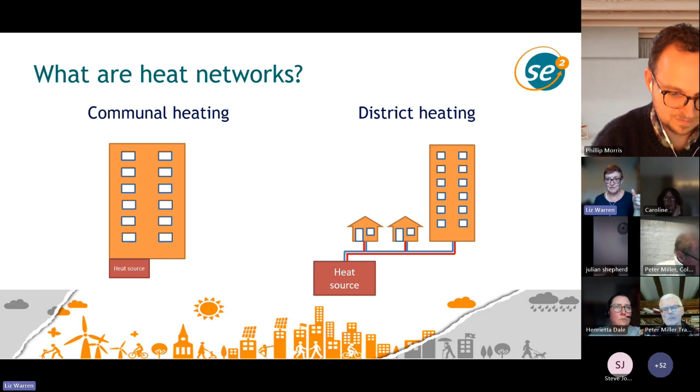In terms of scale, that can go from a couple of homes through to very large citywide heat networks, which draw on lots of different heat sources. They've got multiple energy centres and multiple inputs of heat into a network serving different types of buildings - homes, business properties, hospitals, university buildings, local council buildings, town halls, leisure centres. All of those could be connected through these networks, which are drawing heat from multiple different places.

We'll hear about Plymouth in a little while from John, which is a great example of one of these where they're trying to draw together multiple different heat sources to connect up multiple different types of buildings. At this scale, it tends to be very urban - you could talk about Newcastle, Leicester, Nottingham, Liverpool, lots and lots of major cities that have heat networks.

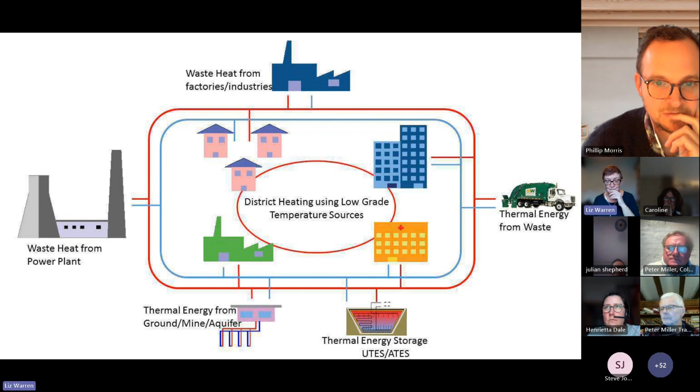But we also see them at different scales, and I'll come back to that a little bit later, just to explain a little bit more about the types of heat networks that are out there.

There's an issue with the slides not being visible to everyone. Let me exit spotlight so that should show your slides, because something is happening where your slides aren't clear to everybody. Some people are seeing them and some aren't. Most people can see them now though, so carry on, Liz. I'll read out some more - mostly it's been diagrams so far, so we'll see how we go.

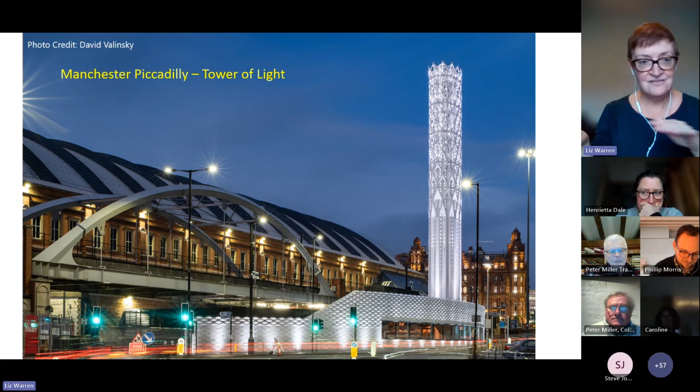And the Tower of Light, that energy centre has a gas-fired heat network and CHP system underneath it, which is sending out heat and hot water to a lot of buildings in Manchester city centre.

My next one, this is the Bunhill Energy Centre in Islington in North London. This is a kind of classic of the heat network sector, we're all quite fond of it. It started off as a gas network, but it's developed over time, and Islington Council, who run the network, have been really interested in how you can bring in different sources of heat.

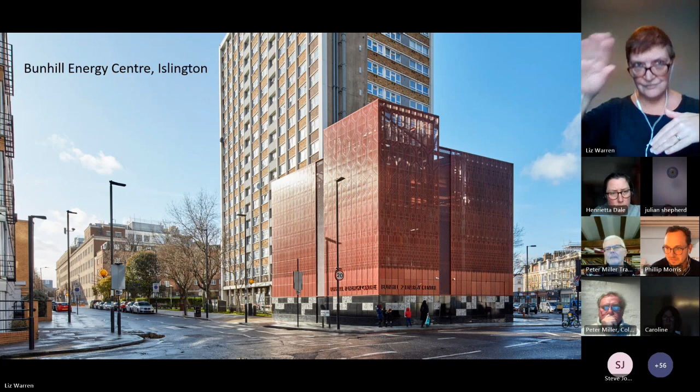This actually draws up waste heat from the London Underground. So all the kind of heat and warmth that the London Underground generates naturally is drawn up into the energy centre, and then used to heat hot water to go out into the heat network.

This is the heat network in the energy centre in Gateshead in the northeast of England, which I just think is a really pretty building. That's actually drawing heat from former mine workings into a heat pump, which then goes out and is distributed around town. That's a really exciting project, making use of underground energy resources.

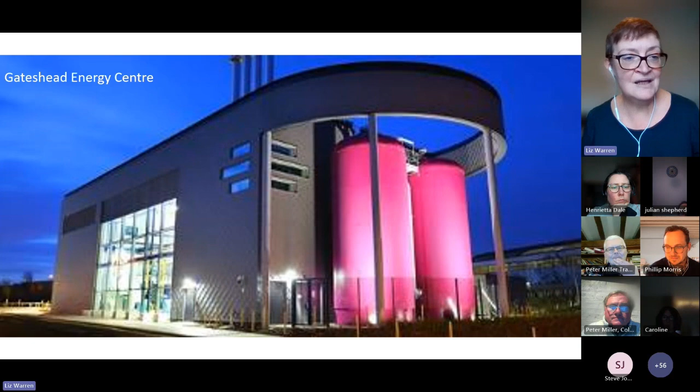And then perhaps my favourite, purely for quirky personal reasons, this is the Amager energy from waste plant in Copenhagen. Denmark is really the centre of excellence of heat networks and district heating, in terms of its reach across a population.

This quite beautiful energy from waste plant - the green across the top of it is a dry ski slope, and in winter a snowy ski slope. So if you wanted to go skiing in Copenhagen, that would be my recommendation to you.

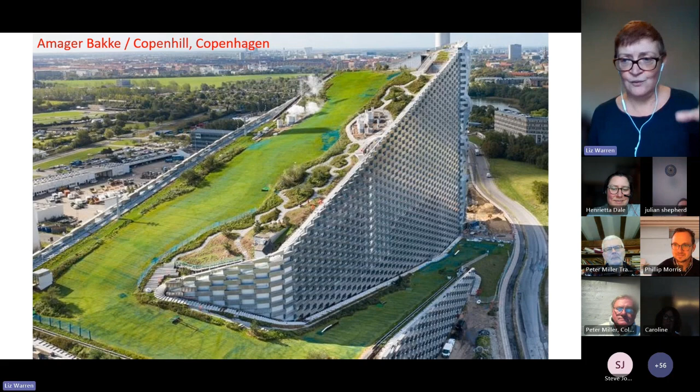Now, I talked a little bit about these being quite urban things sometimes, and it's like, well, where are heat networks? Heat networks tend to be where there's high heat demand density - lots of people who need heat or hot water or steam or cooling, and lots of people who are near to each other. So there's demand and there's density of demand.

Historically, heat networks have been very much associated with big urban centres, and that's where a lot of government policy and thinking has been - let's get the biggest bang for our buck right now by looking at those big centres. Some of the longer standing networks are in places like Leicester, Nottingham, Southampton. Some of the big developments right now are happening in places like Bristol, and as I said, we'll hear about Plymouth shortly. However, not all heat networks are in major cities.

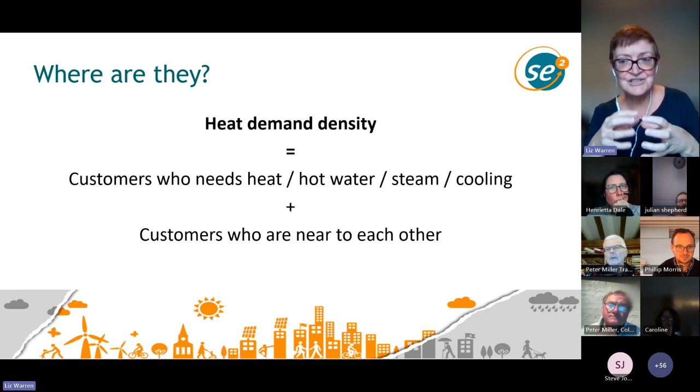Government has recently published a map - there have been several iterations over the last decade or so - of heat demand for the country. You can see where there is potential for a heat network, technical potential, and quite a lot of what you might think of as medium-sized towns or market towns have potential, or there are some very location-specific places where there's potential for a network.

For example, medium-sized or market towns like Rotherham, Halifax, Solihull, Worthing have all got different networks popping up for different reasons. The one in Solihull, for example, which is where my mum lives so I kind of keep an eye on it, involves connecting a leisure centre which already has a gas-fired CHP unit to other buildings locally, including a local college and schools.

We're seeing heat networks as options in some of the planning for new garden villages, urban extensions, edge of town developments. I wish the planning policy would be more proactive and positive towards heat networks and heat pumps generally, rather than allowing fossil fuel heating to perpetuate. Anyway, another day.

We also see examples where industrial sites that are producing a lot of heat, for example a glass factory, are able to connect to or be the hub of a network, because that waste heat is worth something - they can sell it into a network. We're seeing a lot of discussion with things like data centers on the same basis, with waste heat from data centers being used to go into networks.

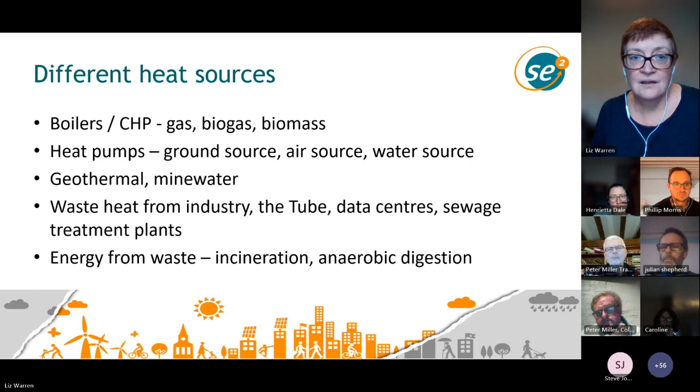I wanted briefly to touch on the relationship between heat networks and community energy, because a huge amount of this is being done either by private organisations, or by private organisations working with local authorities, housing associations, or the public sector more generally, who have the social drivers. The local authority or housing association has been the guardian of the social drivers of heat networks, but it feels like community energy has a role to play, and communities have a role to play, as heat networks become much more part of the fabric of our energy system.

You'll know community energy historically has focused more on power than on heat. It's more and more got involved with retrofit, and it's starting to engage with heat in different ways. But heat is the big challenge when it comes to energy - we use an awful lot more kilowatt hours trying to keep warm than we do trying to run our laptops and keep the lights on. So we need to think about heat, alongside energy efficiency and retrofit, so that we're doing sensible things in terms of insulating and then heating.

Hopefully I've got across that heat is quite a localized thing, and the type of heating system or heat network that you end up with will be about your place and the heat resources that are available to you locally.

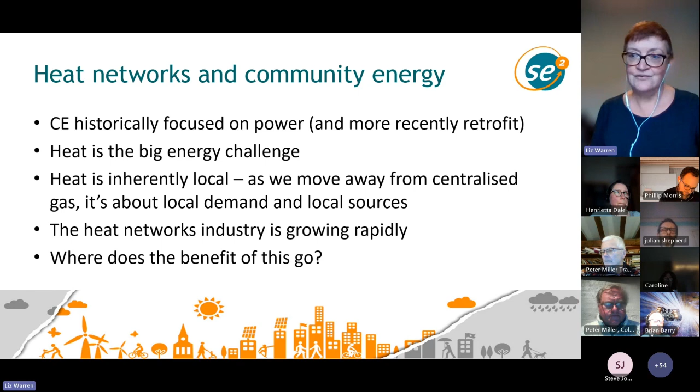And that's the type of model that community energy has always tried to break apart. So what kind of relationship can community energy organisations have with heat networks? Now, the presentations that you'll go on to hear after this one will give you some detailed examples and a really good look at some of the options, but I just wanted to set them out at this stage so you've got some things to be thinking about as we go through the afternoon.

So there are different options. There's the option which might sit most familiarly with the community energy sector, which is community ownership or shared ownership or a shareholding in an energy project. That carries an awful lot of risk. Potentially it carries some reward, which can be then reinvested through your community funds, your community benefit funds. But ownership of a heat network - these are quite large infrastructure projects

with quite a lot of complexity. But that's one option to think about. The community benefit fund, social value type provisions, what we see on the large onshore wind type developments, is this sort of community benefit as a payoff. And I mean, it's great, but it could be so much more.

So what if there is that community benefit funding, how can that be deployed in different ways? How can the community really decide what they want to do with it? The Bristol heat networks being developed by Bristol City Leap are amazing at this in terms of thinking about funding and social value and traditional definitions of social value around employment, but also about really engaging and empowering the community on all aspects of energy.

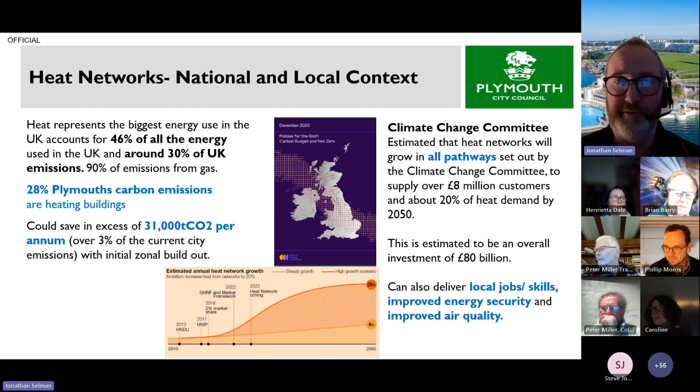So we know, and that's a big ticket item. It's been estimated to be in the region of £80 billion, which is more than offshore wind. So there's a lot of investment flowing into this sector from a variety of sources, some of it pension funding that's got a very long investment cycle, investment model of 40 years or so. But the interesting thing is the Climate Change Committee also pointed out this is not just about decarbonisation. They also identified this would lead to improvements in energy security, because you've got far more diversity, local sources of heat involved in those networks, and also air quality, which I'll come on to. From our perspective, we're interested in local jobs and local skills as well, very much - social value is a big driver for a local authority.

So we've seen quite a lot of changes in the way we heat our buildings over the years, and it's difficult maybe to remember what drove those and what those changes have looked like. I think it's quite interesting thinking about this, because originally this was driven by legislation. If you remember, if any of you have watched The Crown and the bit about Winston Churchill trying to pretend the smog wasn't a problem, until one of his members of staff got run over by a bus, then you'll know about the Clean Air Acts and the fact that we've moved from burning coal in our buildings, in fireplaces. Change happened really quite rapidly as a result of legislation originally driven by air quality.

But of course, gas is also contributing towards NOx emissions that might not be so visible, might not be creating smog, but equally that's a very significant air pollutant, particularly in cities.

And the graph at the bottom shows the uptake of central heating in houses. I'm just about old enough, I hate to admit, when I was very small, to live in a house without central heating, and my gran was probably several decades after that. It just shows how rapidly change happened, from buildings not having any central heating to having central heating systems - the uptake was massive over two decades. And I suppose that's the challenge we've got over the next 25 years. So legislation, amongst other things, can make a huge difference and drive things forward.

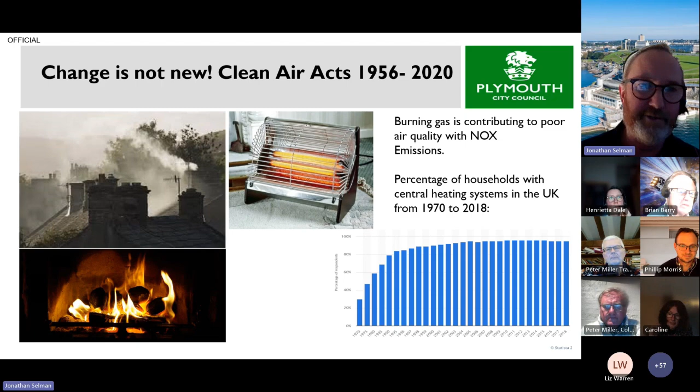So Liz has already picked up quite significantly about what a heat network is, but just to hit one point home, which is around the principle of heat networks - they're accessing the lowest cost, low carbon solution, and that's driving some of the legislation, zonal legislation that's coming through at the moment. And that means waste heat sources, which are there already, stable, not being utilised, are a really good source. I've been quite amazed in Plymouth just how many significant waste heat sources there are that we can deploy.

And they can have other environmental benefits associated with that. But yes, Sweden and Denmark have been down this road since the oil crisis in the 1970s, and even before that, so they've got really extensive heat networks, and there's an awful lot we can learn from the Scandinavian countries in particular around their approach.

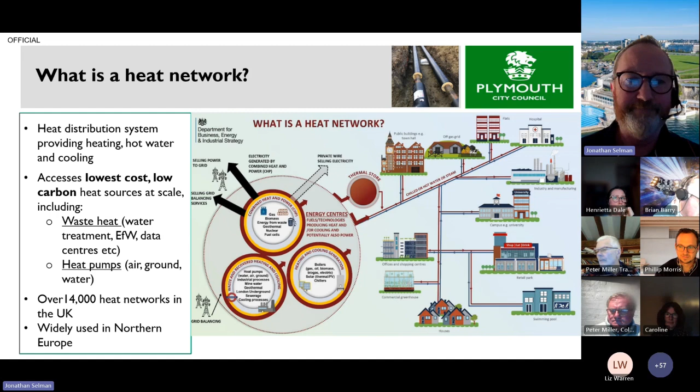So yeah, I mentioned legislation. The Energy Act originally gave powers to the last government, interestingly enough, to implement heat network zoning legislation, and that's been followed through with the new government, which is nice to see - that there's some continuity in terms of continuing to back this approach. So, as I said, it's very much about creating zones which create certainty for investment in heat networks on the basis that it's the lowest cost, low carbon solution.

And we found certain buildings, particularly in the city centre of Plymouth, you can't put an individual heat pump on - there's just not enough roof space. So sharing a heat source can be really important technically as well as in terms of the economics.

And the approach they're proposing leads to a raft of regulations, which they're working on at the moment. So Ofgem have already been appointed as regulator for heat networks - that's existing and new heat networks. And I'll talk about the consultation, which is ongoing, that Ofgem are leading.

And there's also been consultations around the zone legislation. Effectively, the intention is that there'll be a zone developer who would roll out, be selected through a competition process, which might be run by the local authority, who would be the principal developer of heat networks and operator of heat networks within an area.

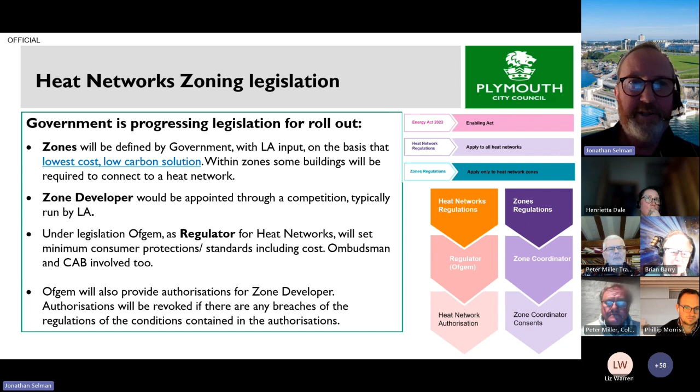So this has been driven nationally and locally. It's really important in all your local areas to try to get local authorities to have supportive planning policies around this and strategies that really help. So we've had through our climate emergency declaration, and that's driven a whole range of things.

So our Plymouth plan, our corporate plan - one of the six priorities is green investment, jobs and skills. Our net zero action plan very much refers to heat networks. Our local economic strategy, for example, talks about heat networks as well.

And our joint local plan, which is our planning policy, has basically been very strong in this respect, underpinned by our citywide strategy on this. So it's really important to have the policy frameworks in place on a local level if you can. So do make those points to your local authority.

And so planning policies basically have to be underpinned by evidence - it has to go through an examination. So our evidence in part was the citywide strategy, and that came up with these quasi zones in 2017, and then that was adopted in our policy. So we've been busy lining up new developments, major developments, which can connect to the network as and when that network is there, if it's not already.

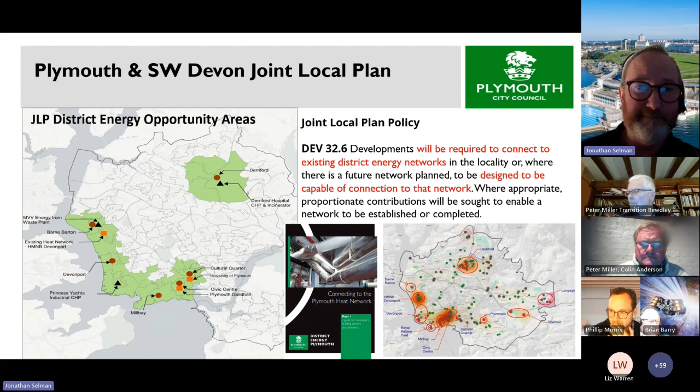So, I'll start to talk about the benefits. Across those two zones, we've modelled schemes which we feel could be economic, of around 400 million. So it's a big investment that's needed, possibly in some cases beyond the means of community energy, but I feel community energy definitely has a role to play in this overall mix.

So obviously opportunities with jobs, significant, probably one of the most impactful things we do as a local authority in terms of decarbonisation. The zonal approach could, we feel, achieve between 3 and 5% reduction in Plymouth's carbon emissions, which kind of aligns with that 20% figure that's been mentioned before.

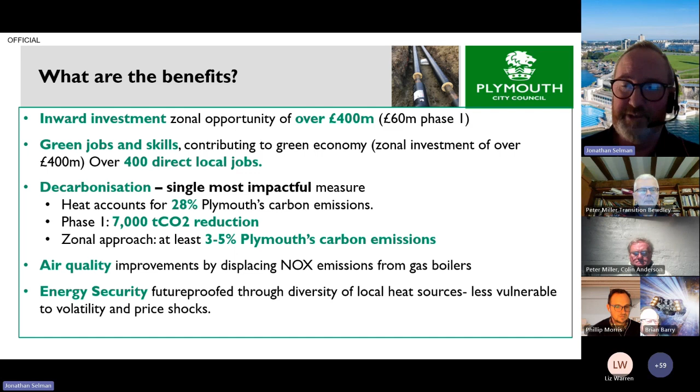But obviously, using carbon as the only commentary around heat networks is missing a trick, and air quality, energy security are also key facets to this approach. It's really important to keep mentioning those other issues, other benefits.

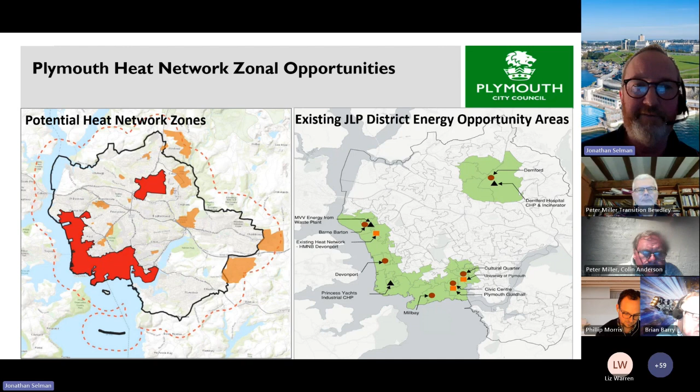And the largest zone that's shown in the previous slide in red, there's effectively the waterfront area. So this is the city centre. I'm not sure if my cursor is showing up on the screen. Maybe I can click on cursor.

That wouldn't be the end of the heat sources. Clearly, you need to build resilience into these schemes and diversity because, for example, the energy from waste plant has several weeks downtime in the summer, and there may be unplanned outages as well. So effectively, the other waste heat sources we can deploy within that scheme.

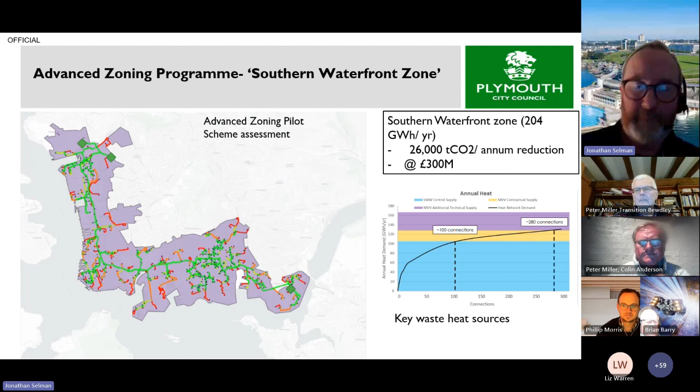So that shows the potential, and this is where we're starting. We're starting with a reference scheme that we intend to go out to the market with next year as part of a zonal approach, which would harness some of the waste heat from the Southwest Water Plant.

And that's an environmental good story there, because effectively what we're doing is taking waste heat out of the treated water, which would otherwise go back to the sound, going to the sea. We know that the sea's heating up, so it's taking heat out of the urban environment and using it in the heat network.

But we're also considering, we're also trying to utilize a low temperature system that can also dump cooling. Increasingly, we're seeing cooling demand increasing, and that can be rejected back into the network and reused on other buildings for hot water demand, for example, in the summer. So waste heat recovery is another potential benefit.

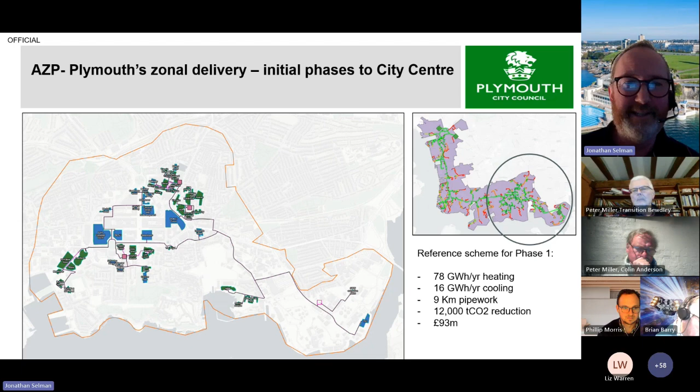But obviously, heat networks don't have to only be concentrated in the really dense areas. I saw a presentation recently from Gateshead where semi-detached council housing is being linked together by a heat network that can connect to a wider heat network over time. I also saw Liz's energy centre at Gateshead earlier, which is, I think, next to their solar farm. So at times it's zero carbon. That's a replicable thing for community energy as well.

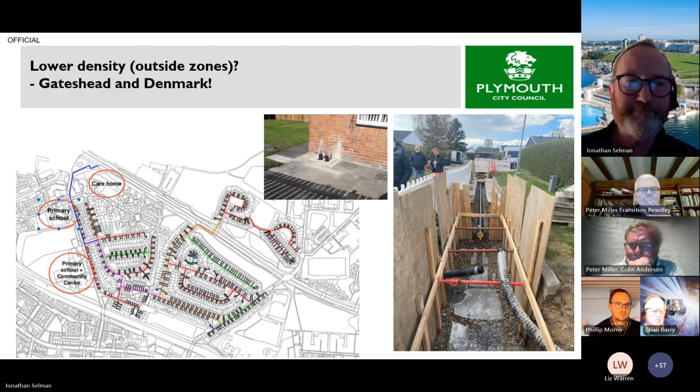Outside heat networks, often the presumption is that air source heat pumps might be the primary technology. I'm just trying to signpost you to a report done by Regen Southwest with Kensa a number of years ago, which obviously has an impact upstream on the electricity grid. This was looking at some of the benefits of using a ground source approach rather than having a dominance of air source heat pumps.

Ground source schemes are classed as heat networks as well. It's another way of using lower temperature, ambient type networks where you're linking up boreholes to supply heat to buildings using a water source heat pump at the interface.

This report was identifying some of the wider societal benefits to the electricity grid, meaning you don't have to put so much upstream reinforcement on the grid, and you don't necessarily have to put so much renewable electricity upstream. So we need to be clever about how we apply heat pump technology, and perhaps consider the opportunities for ground source as well, because of those wider benefits.

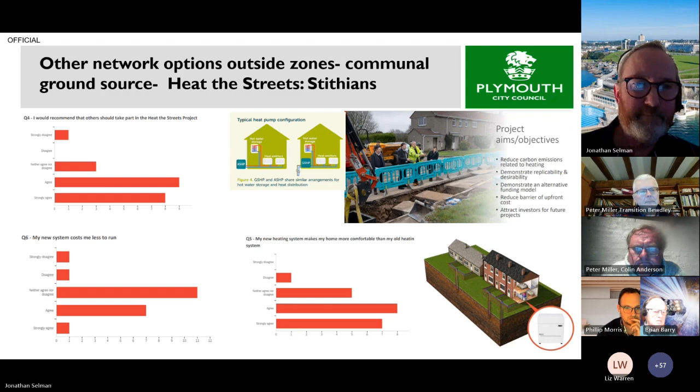Effectively it's a heat network, but instead of, as you can see from this smaller insert image, having an external air source heat pump, you might have an internal or external water source heat pump at the building interface. That's showing Coastline, one of the housing associations connected, who've used air source heat pumps before but really believe this is a good solution. This is an example of a Kensa type shoebox externally in a cabinet, just to show how small those water source heat pumps can be.

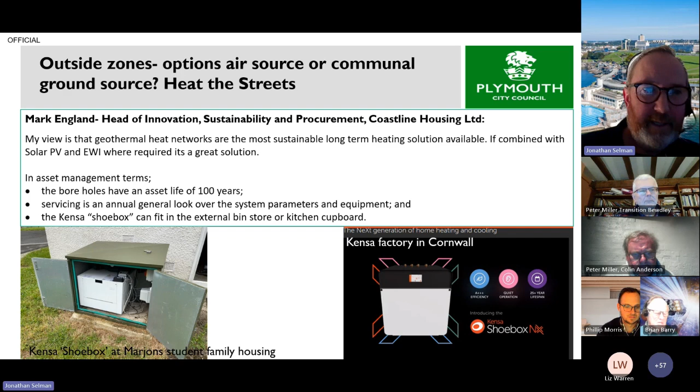So, community energy. Swaffham Prior's been mentioned quite a bit - many of the buildings in the village in Cambridgeshire were heated by LPG. It's been through a bit of a journey, and it's using a mixture of air source, ground source, and electrode boilers, so there is diversity in that heat network.

It's interesting learning from that approach, because there was quite a lot of resistance from some people during that process, arising from disruption or people being skeptical about the change. I don't know if anyone's on the call from Swaffham Prior who's been involved in it, but even the worst critic of the scheme on social media now wants to join it.

The interesting thing is seeing the ripple effect - the adjoining villages also want similar schemes now. That's really where we want to be, where it's not seen as something new, but people are asking when they can have this rather than asking what is this and what does it mean for us.

I think Rossendale are also on the call later on, so I won't say anything about that particularly now if it's going to be repeated. But clearly there's a role for community energy, particularly in constrained sites where air source heat pumps are quite problematic in terms of space or noise, for example.

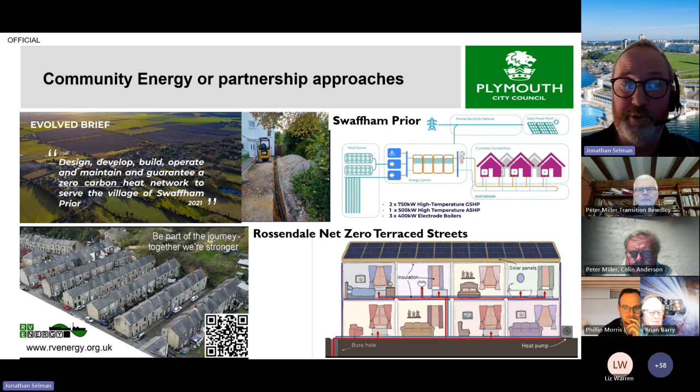There's a parliamentary call for evidence at the moment about unlocking community energy, with reference to the local power plan. That call for evidence actually identifies that community energy typically involves people collaborating with others locally to generate low carbon heat and electricity. That was music to my ears to see, actually.

I think maybe you can engage with that call for evidence and contribute if you're aware of heat schemes, but certainly there's scope for community energy to be involved in that, maybe as part of the local power plan. It'd be interesting to see what the government's proposals are around that.

Clearly there are some challenges and opportunities ahead. Social housing is a good place to start. Certainly in Plymouth, we found they have a preference for ground source because of the long-term benefits and lower costs to their tenants. There's some challenges there, but it's always good to get some scale with social housing, so that's a good way to anchor initial schemes.

There are some challenges where you've got flats with individual gas boilers - how do you link those up to a network? There's some potential funding routes that can help warm homes; the Social Housing Decarbonisation Fund can pay for costs towards connection. There are also challenges around metering and billing, which might be a challenge for community energy, though there is a way around that.

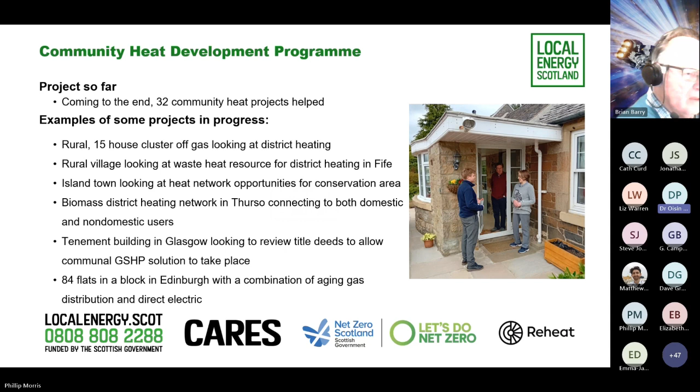Or 84 flats in a block in Edinburgh with a combination of aging gas distribution system and direct electric, looking to completely decarbonise and find an alternative appropriate solution. So it just shows there's a very wide range of projects, like from the small rural up to the middle of cities.

So the first one is Warmlie. I think Brian is on the call from the community group. This is a really exciting project where we've made it through to stage 3 of the program. Initially we gave them an options appraisal of what the decarbonising solutions could be for the project. It's approximately 500 houses, a mix of social and privately owned, with some large non-domestic users as well - the university campus, the NHS Dunbar, the local high school, and a mix of small industrial units.

We gave them an options appraisal for a biomass district heating scheme, ground source heat pump solution, and the counterfactual to all these projects is individual air source heat pumps, to understand whether the heat network stacks up against them. Because of the scale of this scheme, we couldn't look at the capital cost in the initial stage 2, but as part of the stage 3 program, that's what we're investigating - looking at the economic impact if the larger users don't connect to the heat network to form that base load, and whether there could still be a viable business case to develop the network.

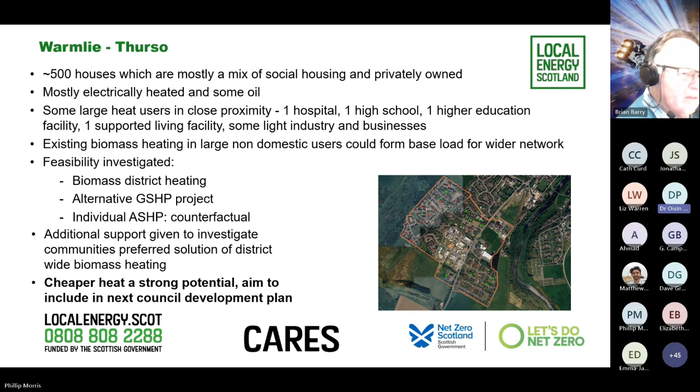We've been engaging with the Highland Council to try and include this project in their next development plan, which will help it go through the planning process a bit easier if it's seen as a viable solution. So it's a very interesting project, and hopefully we'll be able to continue working on it and developing it in the coming years.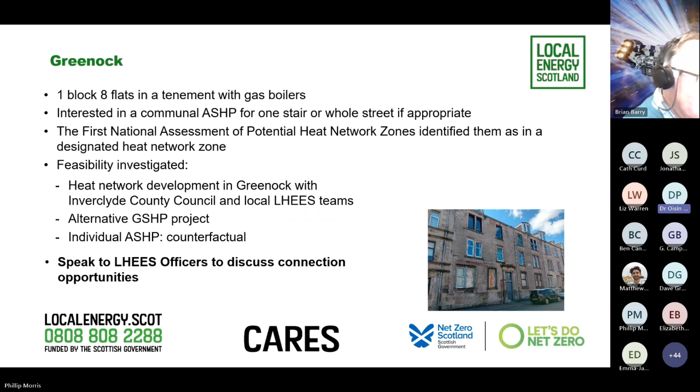In our feasibility study, we looked at that heat network development for them. We engaged with Inverclyde County Council, looked at an alternative ground source heat pump solution, and again the individual air source heat pump counterfactual. It could be that the solution we've come up with - and I think Casper is on this call as well, who works closely with us in developing heat pump solutions - could become part of the district-wide heat network that is being developed. So we're going to feed back this information to Inverclyde Council to try and influence their decisions.

Another interesting project is capturing waste heat in Stirling. The community came to us with the idea of capturing waste heat from a local distillery and wastewater treatment plant in the village. It's a viable project, technically viable in terms of capturing the waste heat from the distillery. The distillery are on board and interested, open to engaging with the community group to provide this waste heat to them.

There's significantly lower carbon impact from capturing that waste heat. This project has moved through to the stage 3 process, where we're looking in detail, engaging with the distillery, at how much the cost would be and what kind of changes the distillery would need to undertake to allow that waste heat to be captured into a local district heat network.

It's important to understand that the distillery is crucial in the early development of the network. Any efficiency upgrades they may undertake could impact the level of heat available from them, but it's not detrimental to the development of the project, because once the heat network is developed, other sources of waste heat could then be included, like the wastewater treatment plant, or even capturing heat from the river that's very close to them.

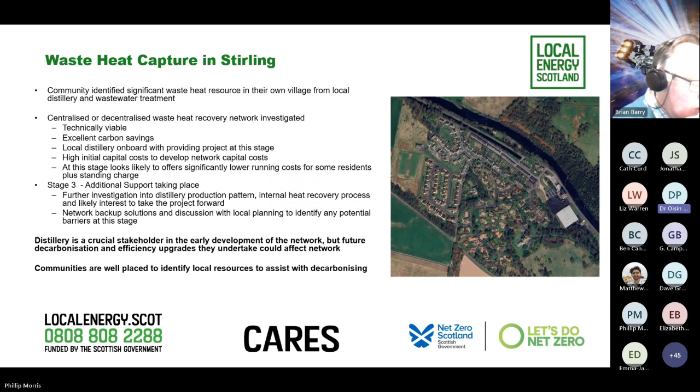It's important that communities understand that they're very well placed to identify local resources. So if you know of large industries in your local community, you'd be best placed to identify them as potentially part of your solution.

Another one, again, completely different, is a farmsteading in East Lothian. This one's interesting because they came to the program with a very specific technology choice. They wanted to use shared batteries to power direct electric heating, and while it's a viable solution, we wondered why they came with such a specific solution, and we suggested they carry out an options appraisal to look at what the alternatives could be.

They could be decarbonised using air source heat pumps, individual air source heat pumps, or other similar technologies. But we thought we could compare what they want with these other solutions, and it would be good learning for the community heat development programme, because it might be that shared batteries and a large solar farm in the field next door might actually be the best solution. That could be something we recommend to other communities in similar rural farmsteadings.

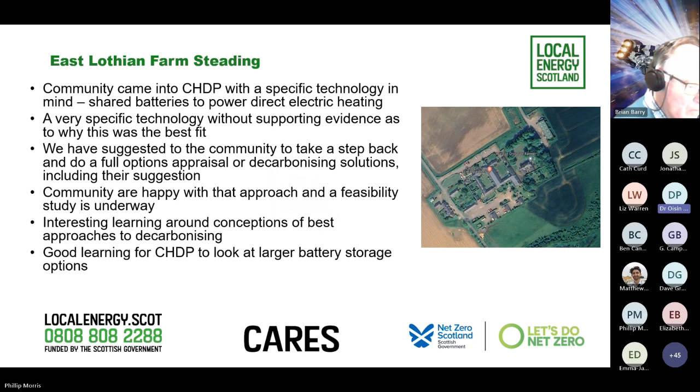I think next slide, and then I think this is the last project. I've nearly finished my time anyway. So this is an interesting one because they have an existing communal heat network in their building that's managed by a factor. Property factors are very common across Scotland. This was a communal wood pellet heating system, but they had poor engagement with the factor and weren't exactly sure what they were paying for.

So part of the recommendation from Reheat was to learn about the heat supply contract arrangements that could be put in place to make sure the community better understands exactly what they're paying for, and to have management of the system, because currently they're paying excess fees for late deliveries. So yeah, it's just interesting that it's completely different to the other projects.

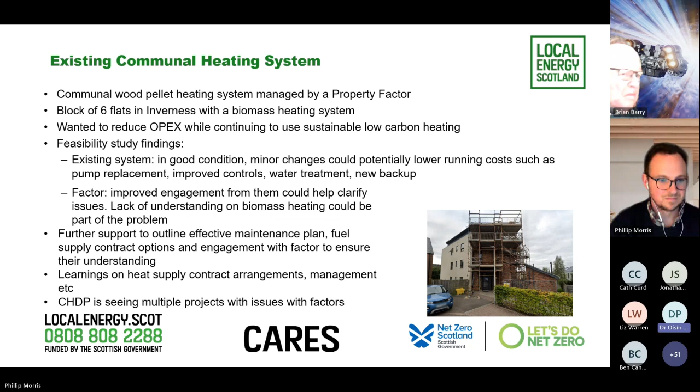And then I think there's only one slide left, Philip. Yeah, so essentially this has been a whistle-stop tour of some of the projects in the programme, and there are, like I said, 32 in total. We're coming very near the end of the project, so we will disseminate much more of the learnings starting in March, end of February, and it will be open to all members of the public, anyone interested in community heat. We'll be able to share the invite to that meeting, and we'll be able to talk much more about this programme at that stage.

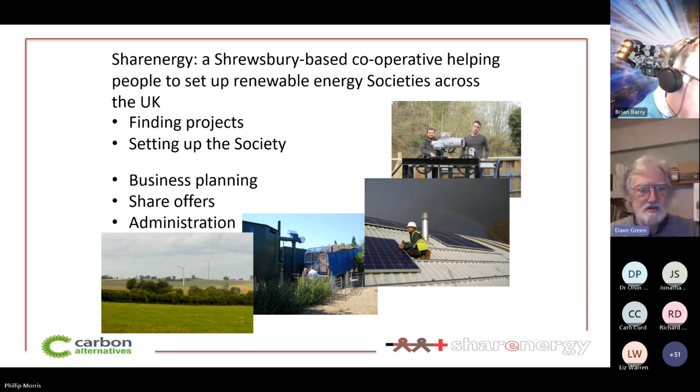I'm a project manager at Sharenergy, and I'm also treasurer of Shropshire and Telford Community Energy, so I have two hats on with this project. Sharenergy is a Shrewsbury-based co-op helping people on community energy schemes across the UK, from feasibility right through to running existing schemes. Shropshire and Telford Community Energy is a Community Benefit Society which owns and runs a 10 megawatt solar farm near Whitchurch in Shropshire.

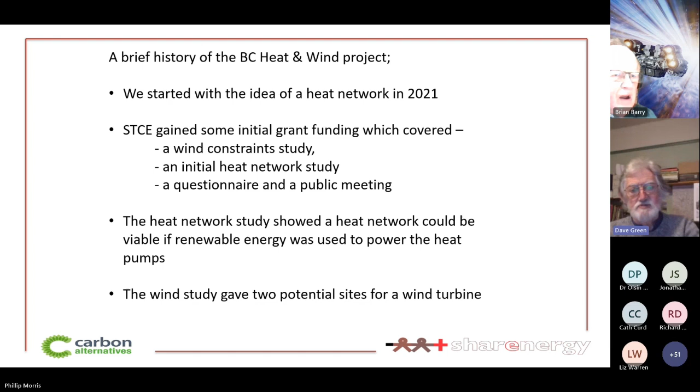So we started with the idea of a heat network in Bishop's Castle in 2021. We actually started off looking at a smaller sort of ambient loop scheme, but with the end of the non-domestic renewable heat incentive, we started looking at a larger, more centralised network. We gained some initial grant funding, which covered a wind constraint study, an initial heat network study, a questionnaire, and a public meeting. We found that a heat network could be viable, but only if renewable energy was used to power the heat pumps. The wind study gave us two potential sites for a wind turbine.

We spent 2.5 years trying to get permission to ask for permission for the wind turbine. We finally got that in August last year. And of course, July this year, that requirement was abolished when the government changed the planning guidance. But anyway, it was a useful experience. I think it got the plan well known.

We had to go and talk to the council numerous times, and when it came up with the idea of getting it in the local place plan rather than the neighbourhood plan, which was the obvious route, the town council gave us unanimous support. So we now have that permission to ask for permission for a wind turbine. This decision opened up further funding, including we got 100k from the Community Energy Fund earlier this year.

Bishop's Castle is a fairly compact town, around 600 houses, 2 schools, a swimming pool, theatre, etc. Completely off the gas grid. Most properties are heated by oil or LPG with some electric. The centre of town is older properties, solid walls, a lot of them listed. Very difficult to do holistic whole house retrofit, and very little space for fitting air source or ground source heat pumps on an individual basis.

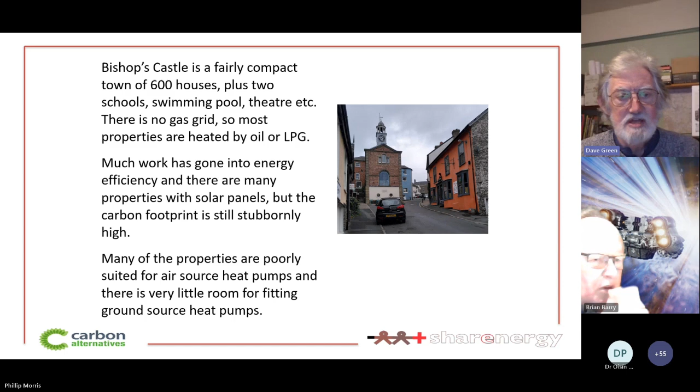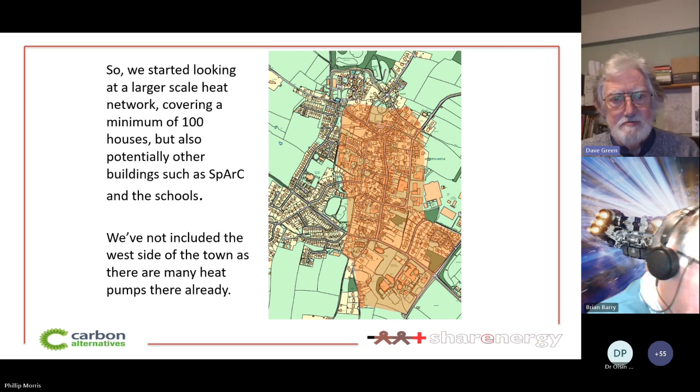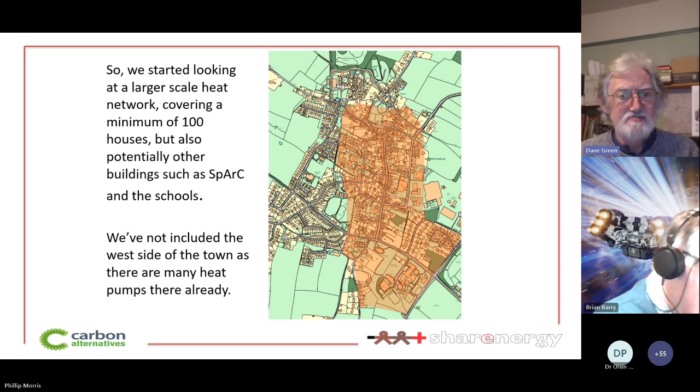So the idea is the shared loop scheme that we looked at previously. We started looking at a larger scale heat network covering a minimum of 100 houses, but also very much with the anchor loads of the leisure centre and the community college. You might notice we're not even looking at the west side of town. That's because there are already quite a few heat pumps there - the local housing association have been very proactive in fitting heat pumps. So there's not much point putting a heat network down a street where half or more of the houses have got heat pumps already.

So we're interested in a just under 1 megawatt wind turbine, around 54 meters to the hub, 80 meters to the tip. This is considerably bigger than anything in the local area at the moment, but relatively small by today's standards - we're talking about 150, 230 meters to the tip these days for larger scale wind turbines. The Lawrence Weston wind turbine, for comparison, is just over 4 megawatts.

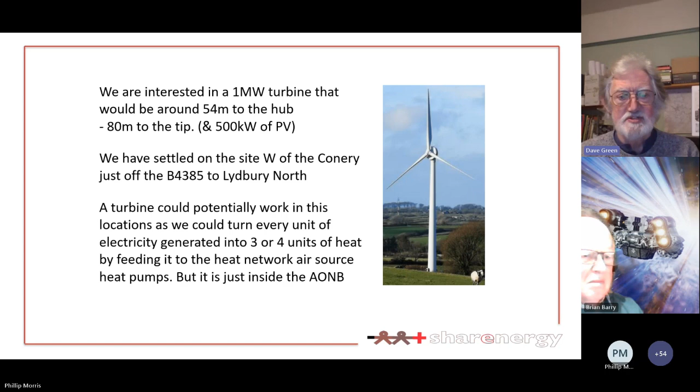We've got a site just southeast of the town, and it's not an ideal wind site - we're halfway up the hill rather than at the top. It's just inside the area of outstanding natural beauty, but that means it's close enough to town for us to run a cable back. Because we're taking 1 unit of energy out of the wind and converting it to 3 or 4 units of heat, it can work. Having it in that location means we're reasonably hopeful we can get it cleared, even though we're just inside the AONB, whereas if we went to the top of the hill, we probably wouldn't.

We've done some landscape visual impact assessment studies. Interestingly, we've had 3 public meetings, and we had a few objectors to the wind turbine idea initially when we had 2 sites. But at the last public meeting and the last stall we had in the square, we had no opposition to the wind turbine at all. It was basically: get on and do it. Why haven't we got 2?

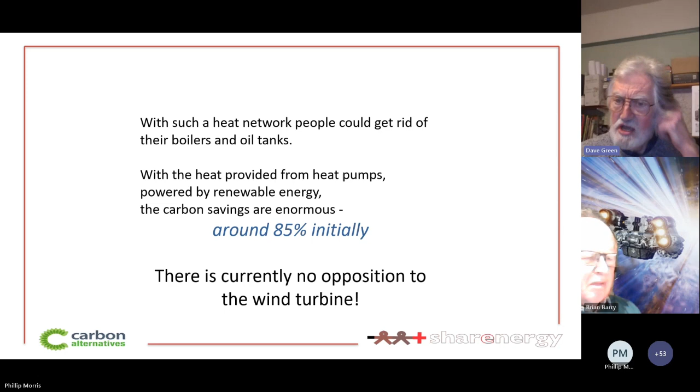So the discussion was about the detail of the heat network, particularly around standing charges and everything. The whole idea is that people will get rid of their oil boilers and oil tanks, and we can get carbon savings for those taking part of around 85% initially. It's not 100% because we will have some oil boilers for backup and top up. If you go for 100% net zero, the costs rise quite considerably. But hopefully in the future we'll be able to swap the oil boilers out and put electric boilers in when the price of electricity compared to oil has dropped, which we expect it to.

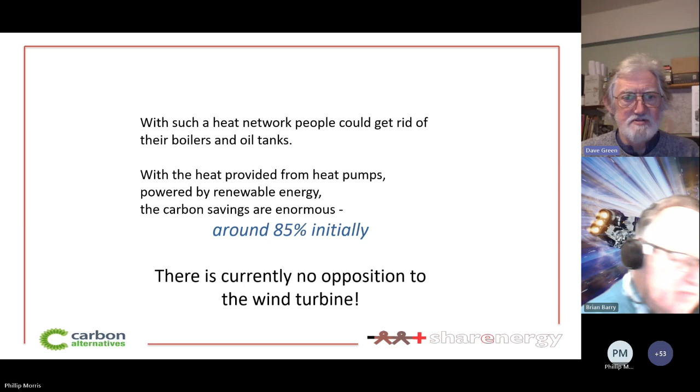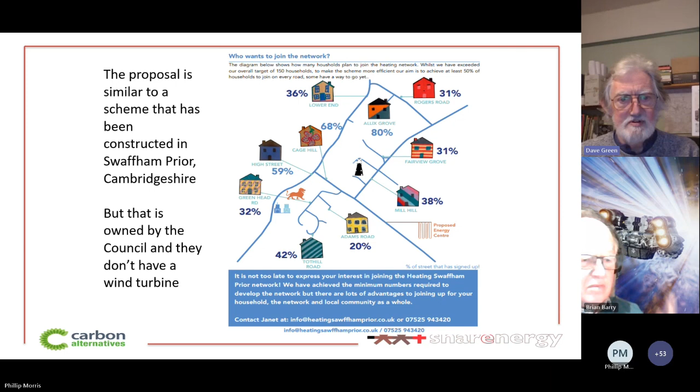This is similar to Swaffham Prior, as I already mentioned, except Swaffham Prior don't have a wind turbine - they have connection to a solar farm, which is all very well, but it doesn't give you as good a fit. The advantage of a wind turbine is it's generating electricity when we most need it. And Swaffham Prior, although it was community led, is actually owned and run by Cambridgeshire County Council, so it's not actually community run.

So we've had significant support for the project. We had a public meeting just about 18 months ago which actually got onto Channel 4 with Hugh Fearnley-Whittingstall.

The work on this project to date has been funded through Shropshire and Telford Community Energy, with help from some money from the Next Generation Grant for Power to Change and the Community Energy Fund.

Have I forgotten to say anything? Yes, I have. So basically, we've got the wind turbine, we've got about 500 kilowatts of PV, we've got thermal storage, basically very large hot water tanks, so that we're maximising the use of the renewable energy, and we're only importing energy from the grid when we've really had a period of no wind and no sun. We've also hoped to sell electricity to the leisure centre as well, so that we would minimise our export to the grid as well.

Right, so I'm going to move on. Sharenergy have also been working on a project called the Community Heat Development Unit for just over a year now. This arose partly because we had quite a lot of people, mostly in quite small rural villages, coming to us and saying, oh, we'd really like a heat network. Unfortunately, in most small rural areas, a heat network is very difficult to make viable without those anchor loads and without that density of development.

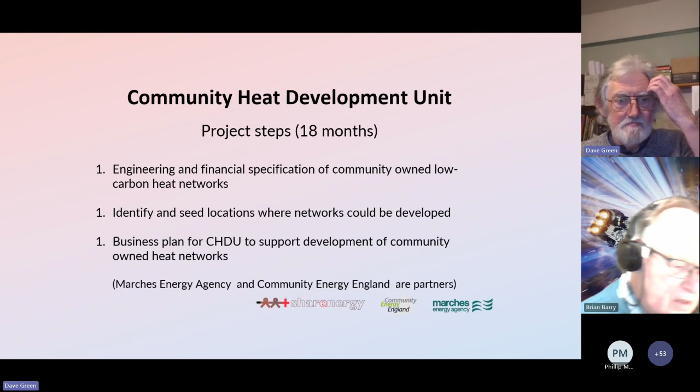I think Ben Cunnell, who's been working on it, is actually on this call as well, so you might want to chip in if I say anything wrong. Ben spent a long time reviewing existing low carbon heat networks and community-led feasibility studies.

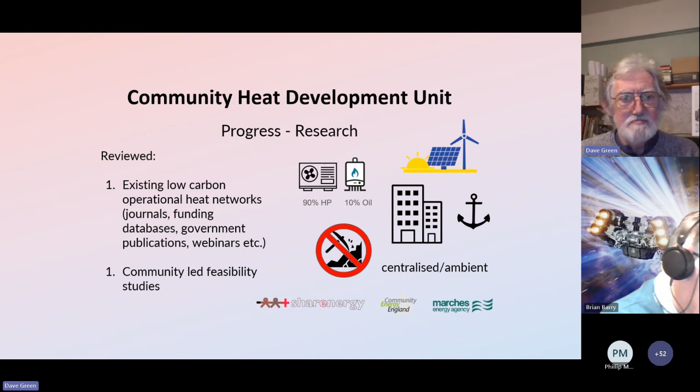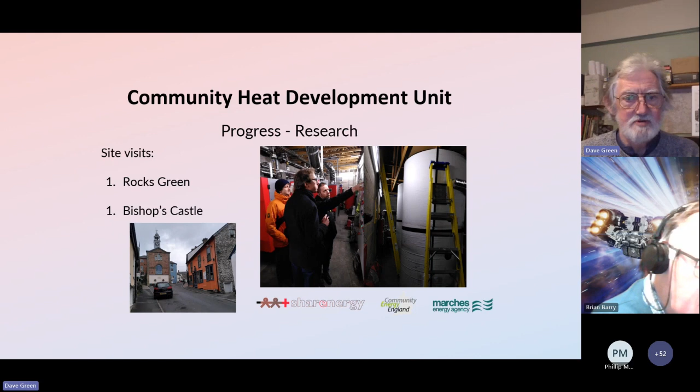We did some site visits to Rocks Green, which is a biomass heat network operational just outside Ludlow, and also to look around the Bishop's Castle project.

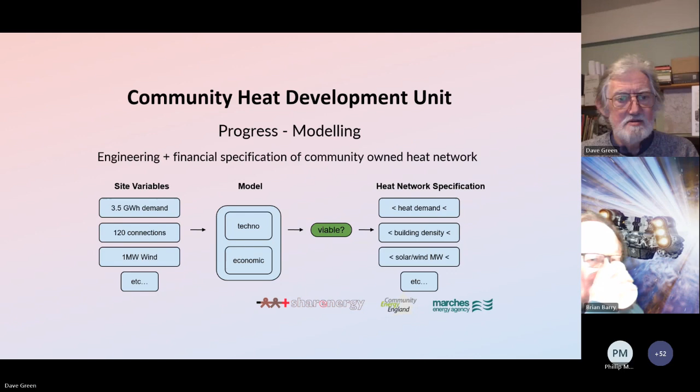And then we've basically been doing some modelling on what the variables are that might make a heat network viable or not viable, putting this into a techno-economic model. So we look at heat density, building density, the options for wind turbine sites and solar sites, and we come up with a sieving map, which looks something like this — it's still evolving, so it might end up looking slightly different. This will be publicly available so people can have a look and see, by our assessment, whether a heat network might be viable in their area.

Now, a lot of this is using online data, which might be right, but it might not be. It might well be that when somebody goes and looks at a local area, they say, well, you obviously have a heat network area here because of this high heat user, but actually they've just gone bust and the site's being decommissioned and turned into housing. So this is very much a first look at the scheme, and when we get to look more closely at a local area, we can use more detailed knowledge to refine the areas and see whether they're viable or not.

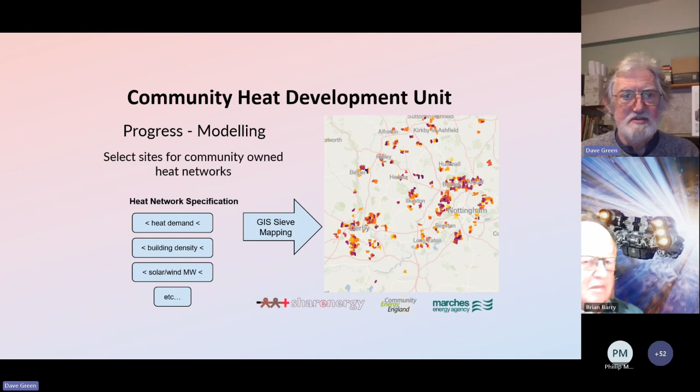It might be that we've found sites that could have wind turbines on them, but there are lots of other constraints we probably haven't been able to identify at this stage. So it's about getting that first pass, and then we need to refine it from there, rule out some of these sites, and work on the ones that remain.

So we've been working on modelling and site selection. We're connecting with community groups at selected sites — a call went out from Community Energy England, who are partnering with us on this, and something like 24 community groups came back. We're selecting 4 of those to be case studies for the next stage of the work.

We're also looking at refining heat network specification, particularly with Marches Energy Agency, who are modelling the possibility of fabric upgrades, to see how they fit in with the whole scheme.

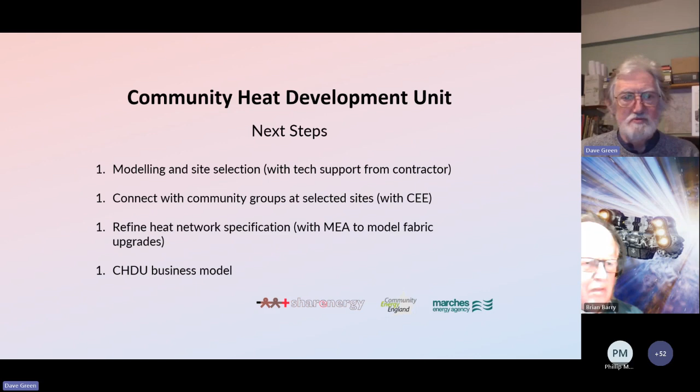And we're also looking - we've got basically 18 months funding for this project, so we're looking at a community heat development unit business model, a business model for the unit itself, so that we can carry on and continue this work for the years ahead.

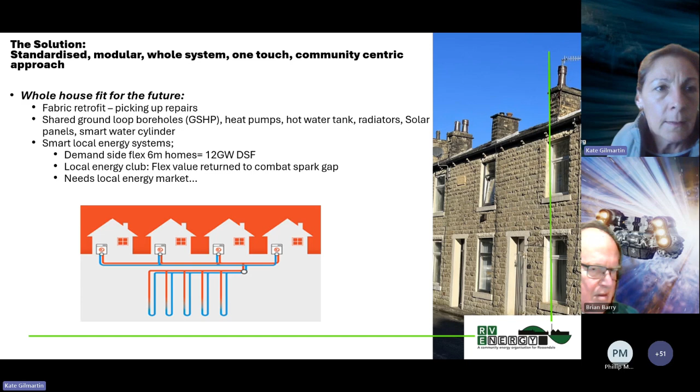How we're working is essentially we are creating demand. The idea is that we are providing a solution we want to pull people towards, and we talk to them about affordable energy in healthy, warm homes. We call it Net Zero Terrace Street when we're going for funding applications, but on the streets it's just fairer warmth—Rossendale Valley Energy, the Community Benefit Society, wants to bring affordable energy in healthy, warm homes to Rossendale. That narrative is really important, because we know net zero as a concept can be very divisive.

We're working with Centre for Energy Equality, and we've been co-developing the Fairer Warmth app or platform. That's a customer relationship management system for people to download, and it gives energy advice. It's also there to collect data, so we can get people to upload their energy data, and get them to ask for an energy assessment, and we can then put in the U values, etc., into the Fairer Warmth app, which pulls through the data.

It starts off with either parity data or EPC data, and we improve the granularity of that data through our energy champions putting it into the app. That feeds through to a building energy model, which feeds into a techno-economic model, which feeds into a financial model. The key is that we want this to be an investable proposition, so the quality of the data and the confidence in it is really key to creating that investable model.

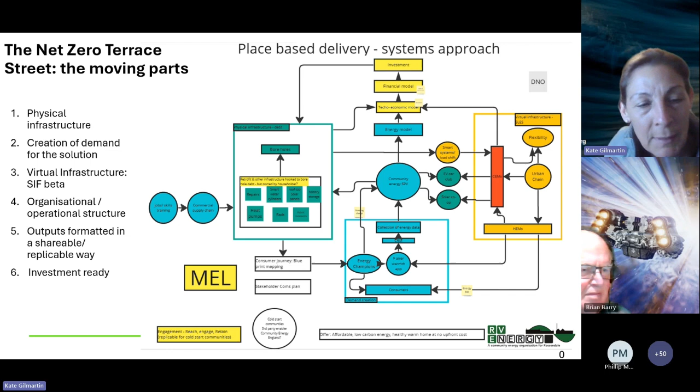So those are kind of the moving parts of the puzzle, which we have to get nailed down to actually deliver a replicable, scalable model. And the whole point is that we do want this to replicate and scale.

So there's lots of things we can share as outputs from things like our Pathfinder 2 project—our DNO planning tool, the smart system, the service model. So all those things are things we're working on now, with the intention that we can work with other communities through a kind of social franchise, because the key is that this has to be a community-centric model.

We don't think it's commercial enough to be picked up and run with by the big boys, but fundamental to the work we're doing is to pass it on to other community groups that have the same ethos as us in terms of asset ownership, community, and the non-profit, non-extractive model.

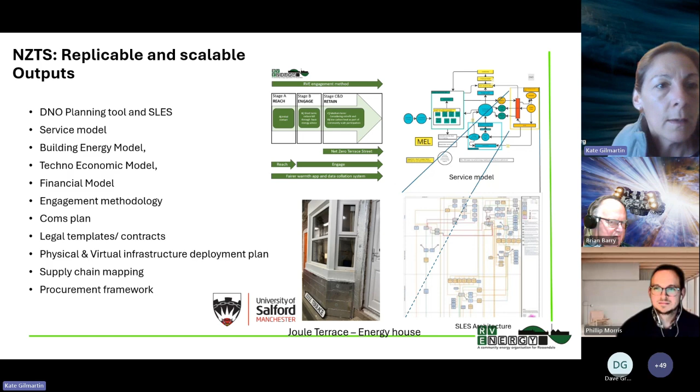So yes, what's next? As I said, we're doing two projects. We've got Pathfinder 2, Net Zero Living, and that's doing a 3-house demonstrator, but it's building all those outputs in terms of procurement methodology, operational governance, templates, legal templates, MOUs, and the techno-economic model. So we're just improving the package with all these outputs in, and that runs till November next year.

And then we've been working with Electricity North West on all the virtual infrastructure, the smart stuff. We've done a Strategic Innovation Fund Discovery, moved on to Alpha, and we're just about to start an NIA—the Network Innovation Allowance project—with ENWL. That's working on the operability of the kit with the home energy management system.

We'll look to do an application for Strategic Innovation Fund Beta in spring next year, and that will be where the home energy management system communicates and interfaces with the community energy management system and the network. So that's a really interesting piece of work going on there at the moment.

But we want to do 200 homes, and we need to find pilot funding to do 200 homes, but do it in a way that's really sandbox—actually working with the universities to look at what the social impact is, what the improvements in air quality are, what the economic multiplier could be. So that's our job now, to try and find funding for 200 homes.

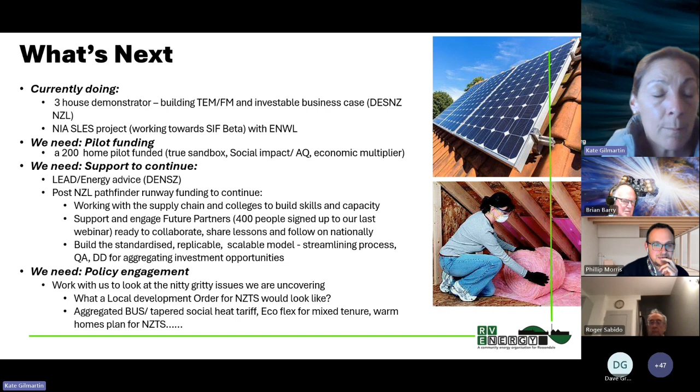And also, I think I said already about how we can look at policy, things like aggregating the boiler upgrade scheme. For those people that can't do it individually, then can we just aggregate that? Obviously, the Warm Homes Plan is coming out as well, so we're really interested to see how that can be applied to area-based retrofit programs. So yeah, I think that's pretty much everything.

So yes, it's about, well, what I say as well to government is, you know, people generally don't care about decarbonising the grid by 2030, which is obviously the government's ambition and the whole point of the Clean Power 2030 etc. But people really do care about having affordable energy and healthy, warm homes and being able to afford their energy bill and not getting a shock. So we've got to flip that narrative, and net zero has to be about people in their homes being comfortable. And it just so happens we're also decarbonising heat, undertaking fabric retrofit, and ensuring that the domestic demand side flexibility is going to get to people who need it first and fastest.

I think as well, it's key to building resilience within communities. So the key here is that you're not leaving people behind, and you're trying to create a new social norm. So it's a bit like broadband, you know, there's going to be early adopters and laggards, but it's become a social norm that people have broadband and they want it and they use it. So we've got to kind of create this new social norm in terms of decarbonised heat as well. And, you know, things like the local power plan have to be a whole system solution, not just generation. It's got to be how it all fits together at that local level.

And as I think I've said, this is about a bread and butter issue. And Labour should be really focused on the fact that if they want people to be able to afford energy, which is a real bread and butter issue, they have to look at these types of solutions to deliver at scale. Yeah, because if people don't, you know, people have to actively see and benefit from the energy transition. Otherwise, it's not going to happen.